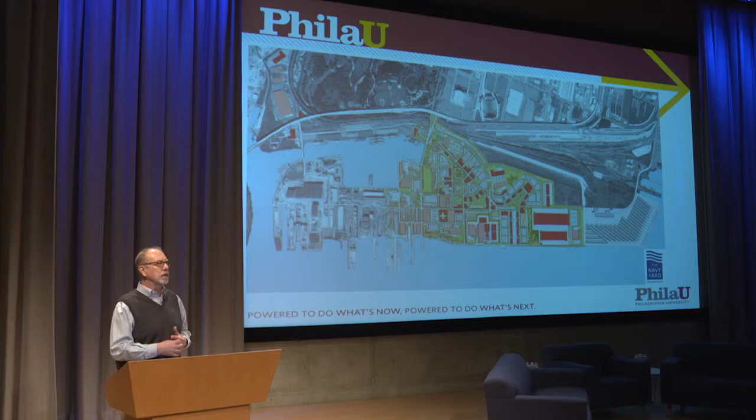This is a master plan done by Robert A.M. Stern and Michael Van Valkenburg in 2013. It's about 1,300 acres, the same size as Center City, Philadelphia. The section we're going to focus on is Mustin Park for this presentation.

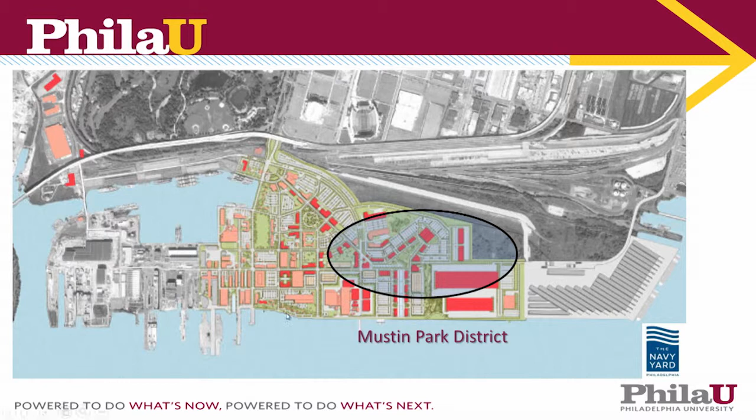This is a very intense and focused workflow about site design content. The challenge we're trying to solve is how do you develop rich design content at the site scale, the district scale, including proposed terrains, and then bring it into ArcGIS and CityEngine so that everything matches up just right.

So this is Mustin Park, the beginning of our model. The first thing we want to do is model the master plan and then work from there. We're interested in those spaces — as Jan Gehl would say, the life between the buildings.

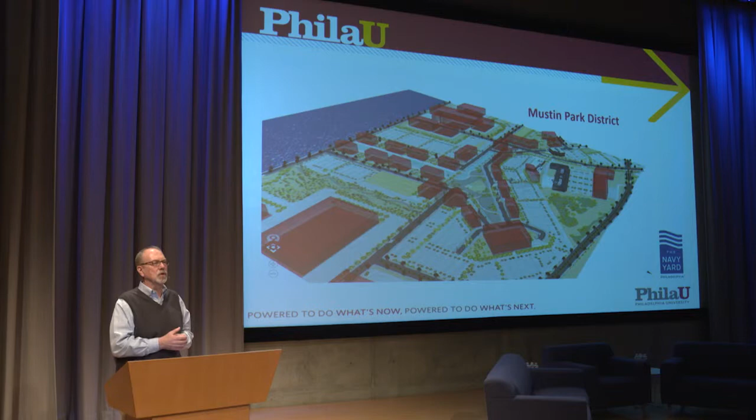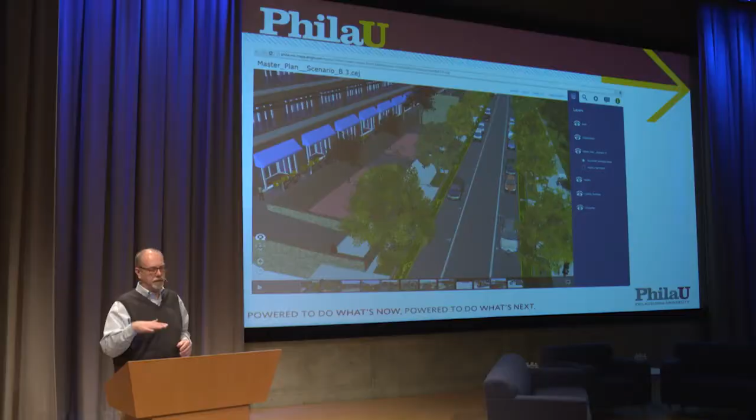Today we're going to focus on pretty much one thing, a parking area, just for demonstration. Here's a model our students did last summer, and everything looks like it fits — first finished floor elevation is about 24 inches above the 100-year floodplain, and things seem pretty good.

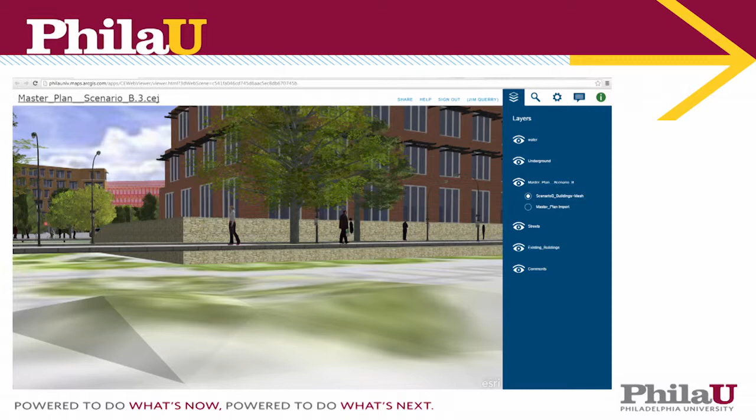But when you actually get down and look at it at ground level, some of those features don't fit. It's not supposed to be an elevated walkway, it's supposed to fit on the terrain. Those things in the foreground are actually parking spaces, islands, striping, and all of that stuff.

So, collaborators — the principal architect for this is Patrick Hagen. He's an Esri employee out in New York City, Lower Manhattan actually, and he's also an adjunct for us at Philadelphia University in the Geodesign program.

Also Steve Lewis and Mike Kissinger with Pannoni Associates, an engineering firm in Philadelphia. They have done a lot of work in the Navy Yard, and through this process have pretty much discovered CityEngine.

SiteOps is an online cloud-based solution we have used to generate site content. The workflow is pretty much designing in that environment, grading in that environment, exporting out to ArcGIS, into CityEngine, and out to the web.

So, SiteOps is a cloud solution for site-by-site design — things like parking and circulation for this presentation — and site engineering, again a grading plan, then exporting via LandXML and DWG. Okay, let's take a look and see what this looks like.

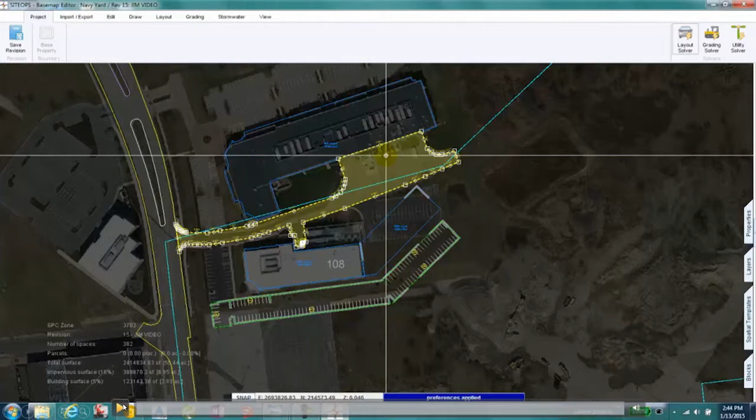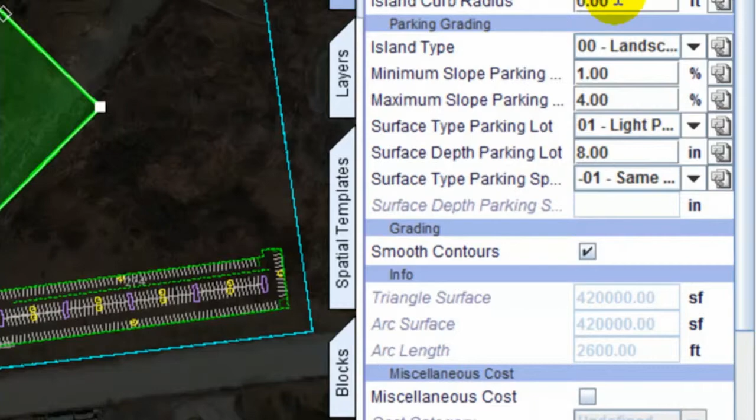There's our parking lot. Come over here and set some parameters — the width of the space, the length of the space, the width of the aisle, angle of the parking, some grading parameters, 1% minimum, 4% maximum.

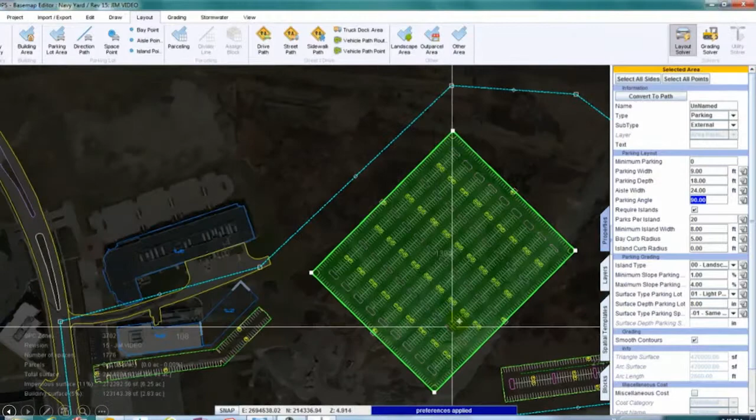We do that, come up, hit the solver button here, and it generates about 1,400 spaces. Those are dynamically linked, so they're all one intelligent object, and when you change the boundary, it dynamically reconfigures your content. Here we're just changing the outline of it and so on.

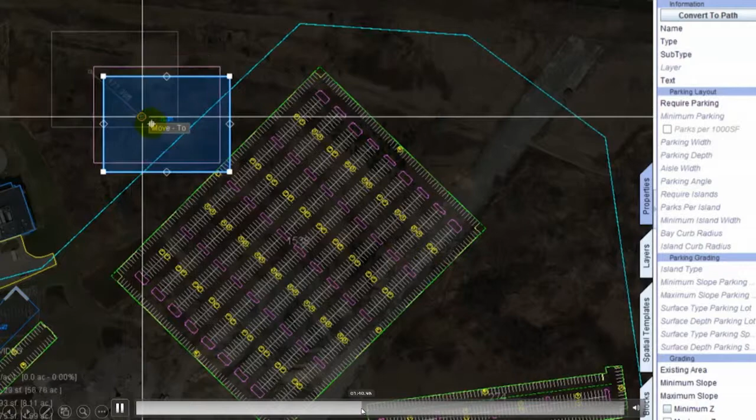So the next thing we want to do is go in and create a building, move that building into the parking, and you can see everything starting to respond to that.

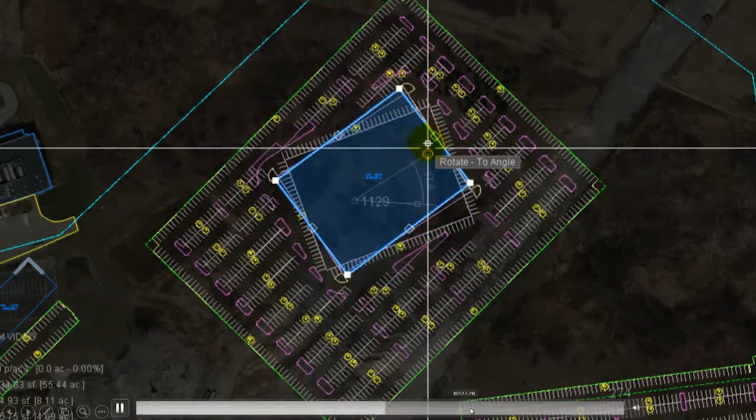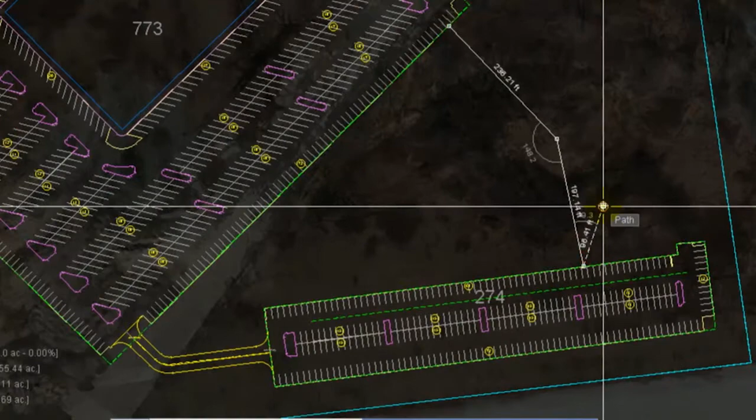Okay, you get the idea. So now we're going to look at grading. Once you arrive at a site design, you need to grade that so that you have a terrain that responds to those design elements.

The grading part is done - although we're seeing contours here, under the hood it's actually a TIN, a triangulated irregular network. It has an interesting component where you've set parameters ahead of time, including unit cost parameters, so as it's going through this, it's trying to optimize grading, balance cut and fill, and minimize excavation on the site, moving earth or material around, while giving you a readout of paving, curb, sidewalk, that type of thing. So it's a pretty good example of a site design content generator.

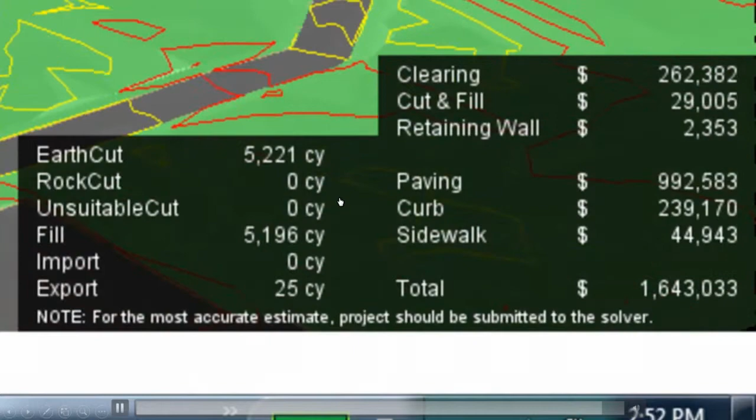So now we're going to export out of this via a Civil 3D DWG file, the line and polygon features of this parking lot, and also via LandXML, the terrain.

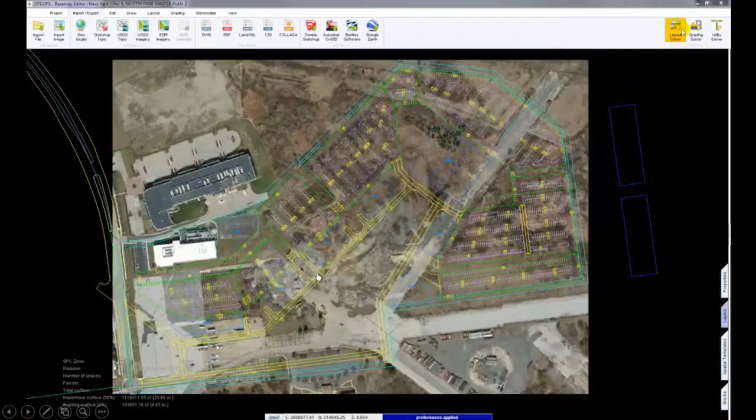So I'm going to skip right to ArcGIS Desktop. We want to bring this data, now that we've generated this design content, into ArcGIS, create a geodatabase, import the design content into it, add attributes, assign projection - all that stuff we're used to doing - and prep it for CityEngine. So here we are.

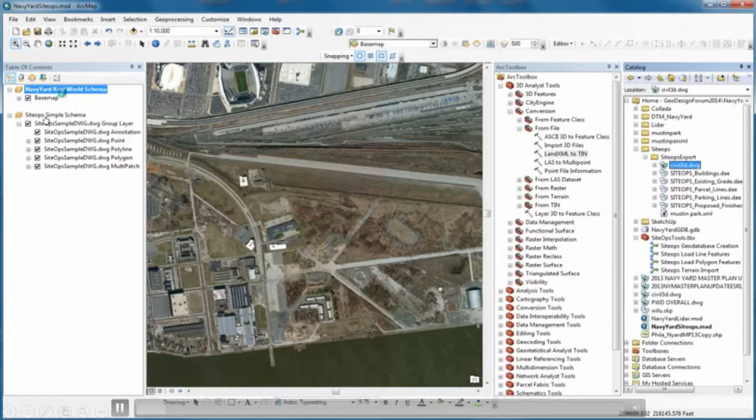Over here, we're going to select that DWG file and bring it into our map, see the features, and then start to configure these features.

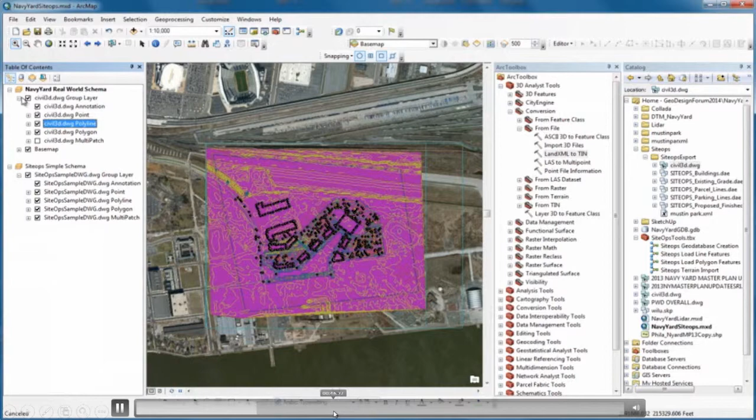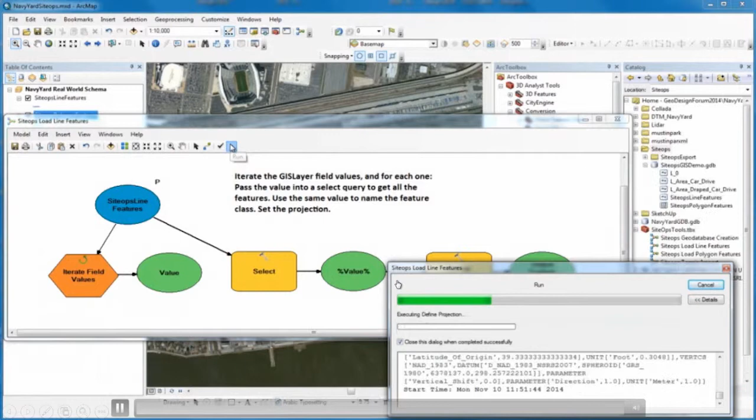So what we need to do is create these features and data tables according to accepted standards. We're going to accelerate this process. As we're creating feature classes, we're also going to create the fields and populate those fields with values. The thing I skipped over here was a model that actually does the feature conversion. The idea is to automate this and make it reusable, so not only can we do it for this project, but for any project.

Now, in CityEngine, we want to bring the data in and visualize it, see it in 3D - a clear representation of the design - and then generate reports. We want to be able to measure the success according to our sustainability measures.

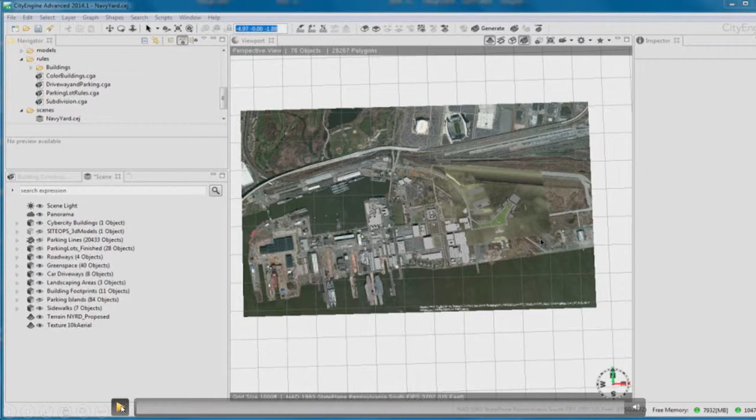So here is our CityEngine model, and we've already started to bring in some of the content. These are the 3D buildings, some existing, some proposed - for Mustin Park, these are proposed. We import the geodatabase, go in and select these features that were exported from SiteOps in the geodatabase, and go down to parking.

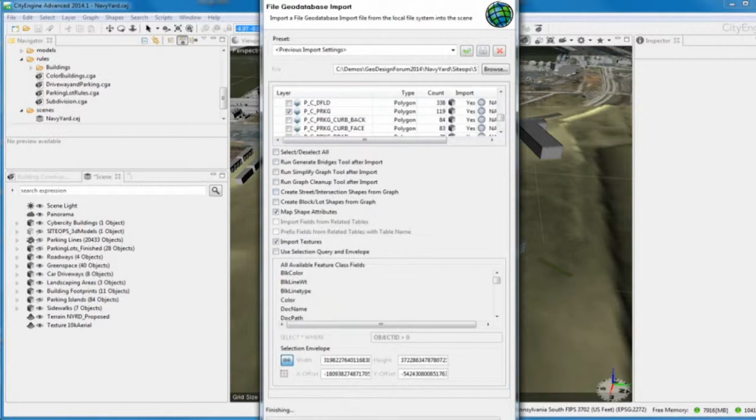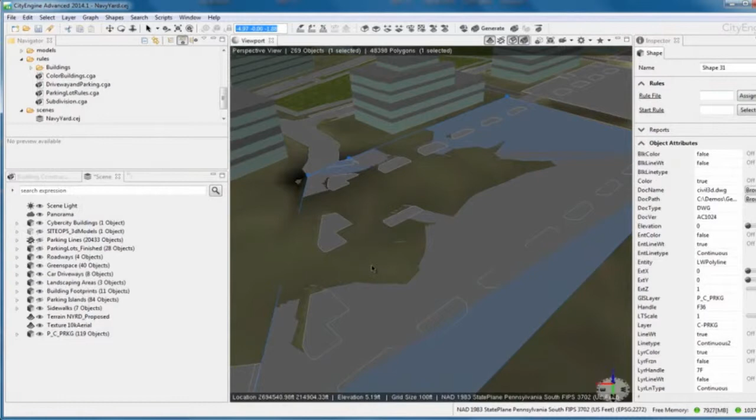Now you can see the features start to appear. These are actual landscape features sitting on a terrain. That terrain, again, is a proposed terrain, so the idea is that these would fit pretty well. However, we're seeing that in some cases they don't - the large, expansive paved areas don't quite fit that landscape yet.

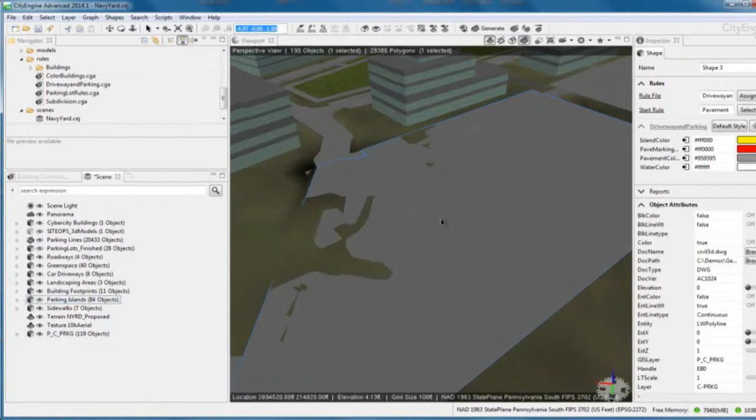So what we need to do is subdivide them. We have a rule set here that we're applying to the parking lot, getting it to the point where it's almost there - almost fitting the terrain - but there are a few things that aren't working. So now we're going to go in and select all of those objects.

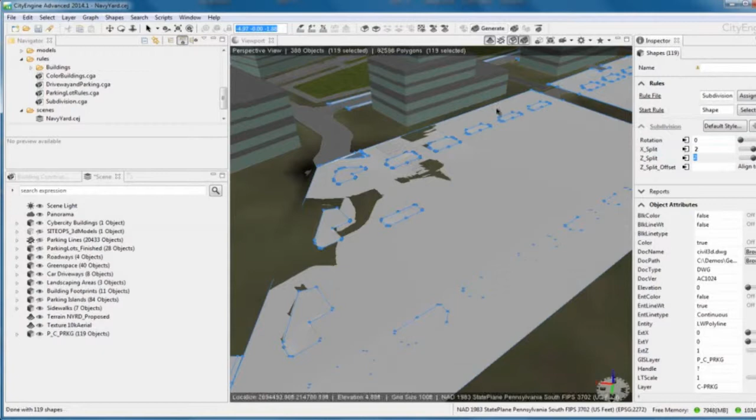We're going to apply a different rule set, a subdivision rule set, and set our parameters at 2 meters by 2 meters. So we're going to cut this up into 2 by 2 meter sections, then convert those models to shapes, and fit those shapes to that new terrain.

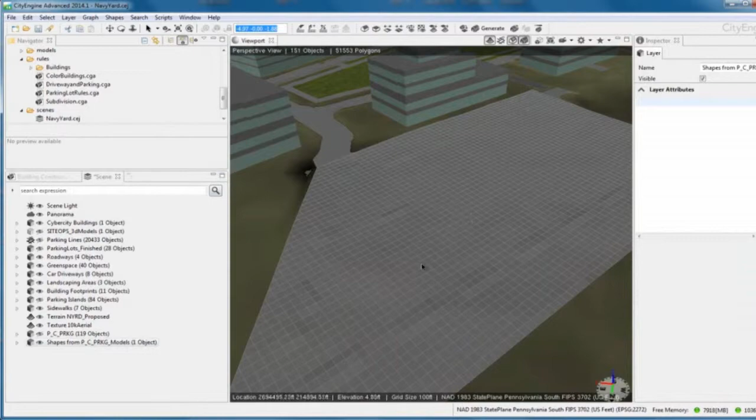If we're successful here - and I know we will be because it's a video - then all of these things are going to fit perfectly, and we can move on to other parts of the design. So you can see that terrain start to appear here, those parking islands. We'll see in a second trees and striping and driving aisles and that type of thing - it's our pavement start rule.

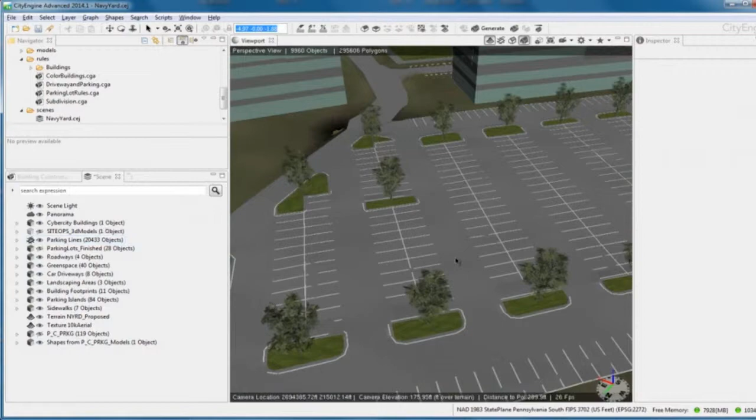And voila, there they are. Everything sits exactly where it's supposed to, and we actually have features, not an aerial photo draped over top of an existing landscape or existing terrain. So that's it.

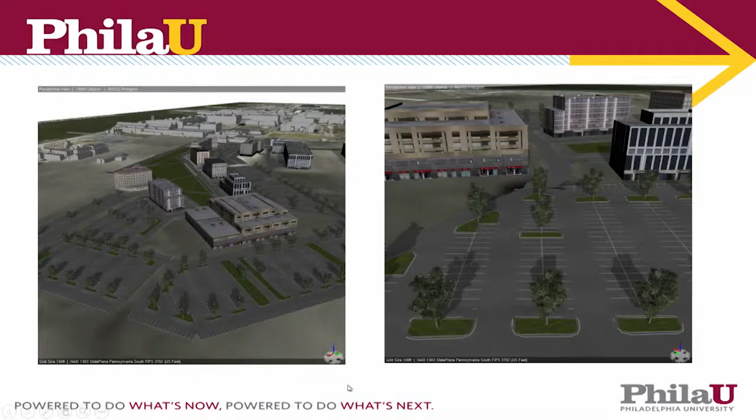Thank you. Thank you, Jim. Thank you. Good job. Thanks.